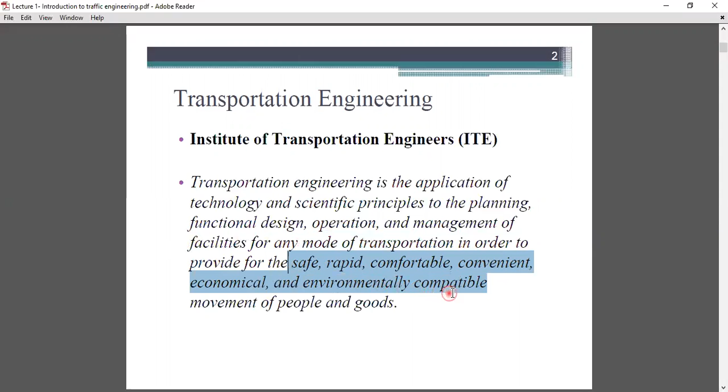There are many definitions, but the short and simple one is that transportation engineering is the application of technology and scientific principles to the planning, functional design, operation, and management of facilities for any mode of transportation.

We are not talking about just road transportation, land transportation, water transportation, or air transportation, but any mode of transportation. This application of scientific principles is carried forward to provide safe, rapid, comfortable, convenient, economical, and environmentally compatible movement of people and goods.

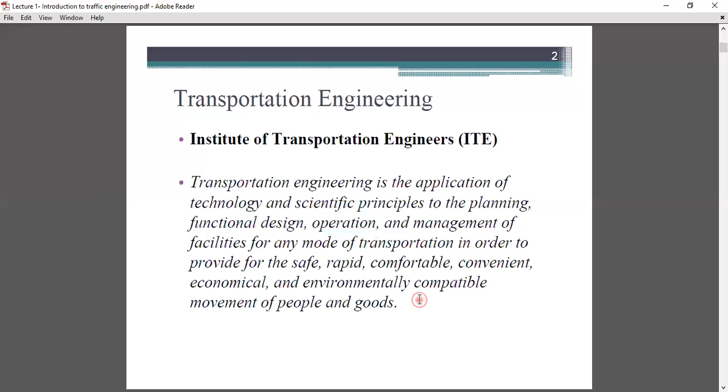So we are studying traffic engineering. What is traffic engineering? Traffic engineering is the phase of transportation engineering which deals with the planning, geometric design, and traffic operation of roads, streets, and highways, the network, terminals, abutting lands, and relationship with other modes of transportation.

Traffic engineering is a subdivision of transportation engineering which deals with the planning, geometric design, and traffic operation of roads — arterial roads, highways, national highways, state highways, major roads, district roads, any mode of roads — street and highway networks, terminals, abutting lands, and the relationship with other modes of transportation.

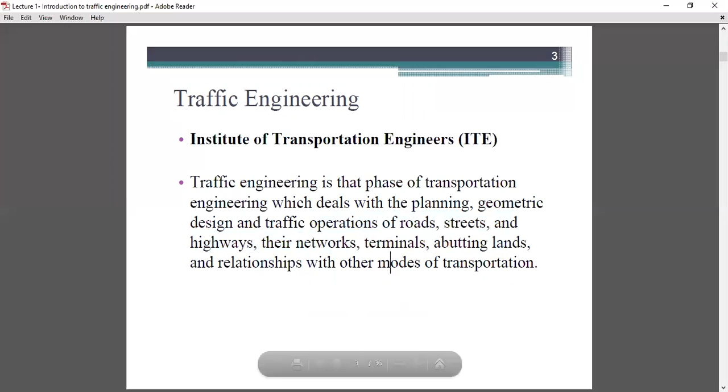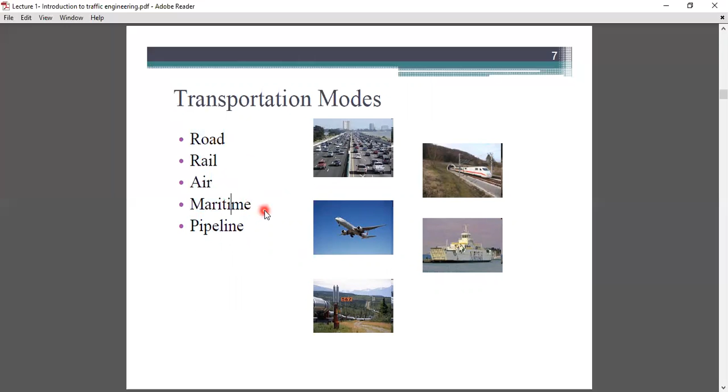There are different types of transportation modes available: road network, rail, air, maritime, or pipeline. Pipeline is commuting or moving fuel or liquid from one place to another — it's a kind of transportation. But there are four main types of transportation: road, rail, air, and maritime, or in simple terms, waterways, or water transportation.

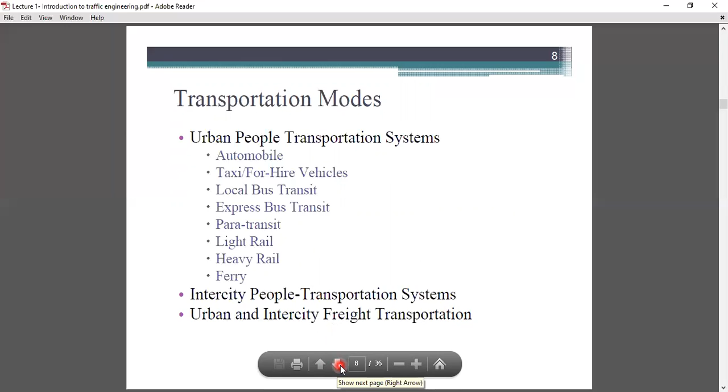These are the different types of transportation studied in the previous subject, urban transportation system, and what modes are available for transportation. Just a fresh look: urban people transportation, intercity people transportation system, automobile, railroad, airways, waterways, and urban and intercity freight transportation.

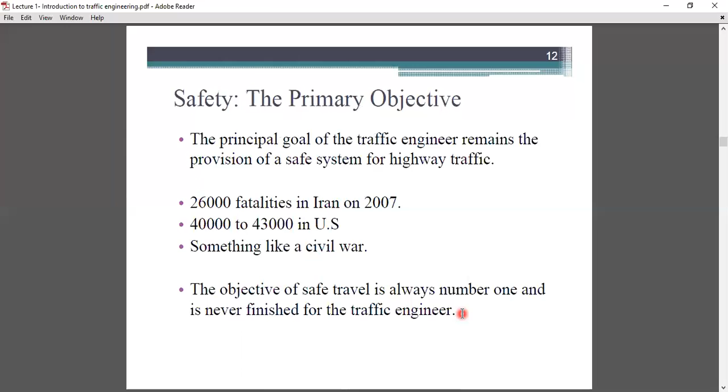Other objectives of traffic engineers are to provide speed, comfort, convenience, economy, and environmental compatibility for the construction of roads as well as sustainable roads.

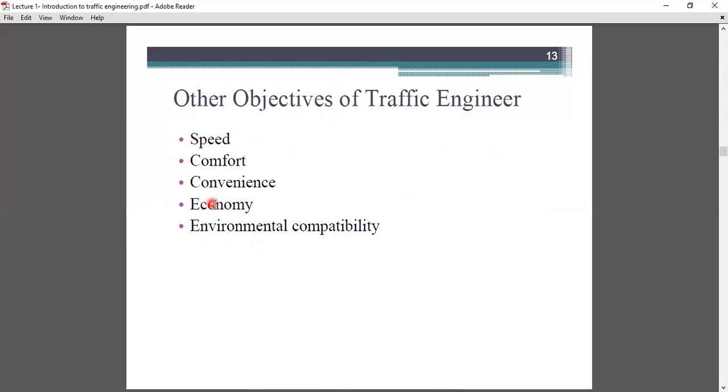Okay, so there are different objectives like speed, comfort, convenience, economy, and environmental compatibility. While speed of travel is much to be desired, it is limited by transportation technology, human characteristics, and the need to provide safety. So there are different types of characteristics available, like human characteristics as well as vehicular characteristics. In human characteristics, we probably know the PIEV theory - perception, intellection, emotion, and volition time theories. There are different types of human and vehicular characteristics which are to be included in traffic engineering.

Comfort and convenience are generic terms and mean different things to different people. Comfort involves the physical characteristics of the vehicle and roadways and is influenced by other perceptions of safety. So comfort, convenience, and the desire of speed differ for different people. Some people want higher speed rather than comfort, but some choose comfort as their primary concern.

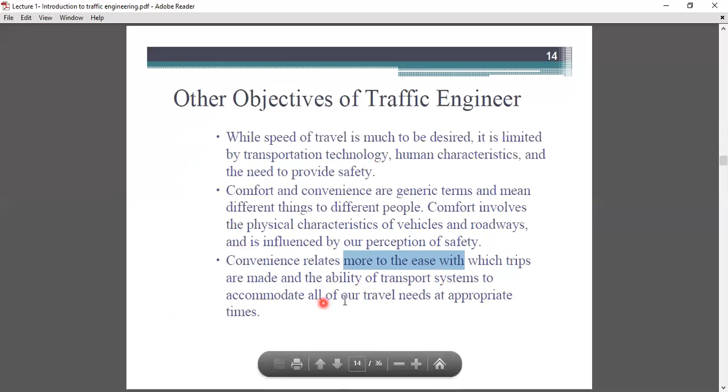Convenience relates more to the ease with which trips are made and the ability of the transport system to accommodate all of our travel needs at appropriate times.

Economy is also relative. There is little in modern transport systems that can be termed cheap. We all know that road infrastructure or any transportation infrastructure has a huge capital investment. Due to modern practices, modern technology, and modern equipment, there is high capital investment going through. Highway and other transportation systems involve massive construction, maintenance, and operating expenditure, most of which is provided through general and user taxes and fees.

Nevertheless, every engineer, regardless of discipline, is called upon to provide the best possible system for the money. So the other concern is to provide economic feasibility.

So if you are hired as a traffic engineer at the NHAI, National Highway Authority of India, your primary concern is to provide a safe, convenient, comfortable, economically feasible, and environmentally friendly plan or road network for the general people and for the country. It is the duty of every engineer to suggest the best possible system for the money. Harmony with the environment is a complex issue that has become more important over time.

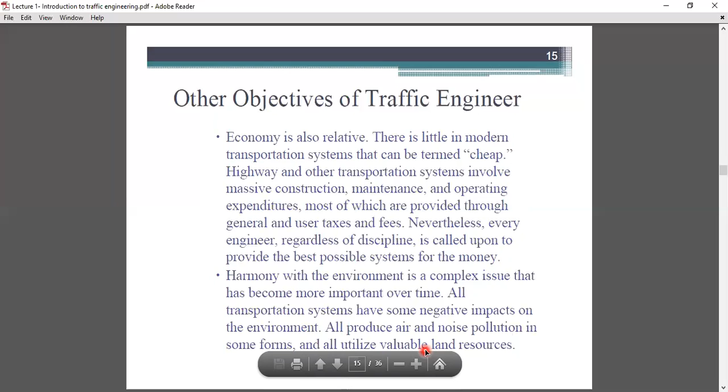This occurs right now because, as we know, due to global warming, there are high voices raised by communities or by many other NGOs that the government wastes valuable land just to create concrete roads and other things. So the best possible suggestions or solutions are given by traffic engineers just to minimize the environmental impact and utilize the best way out of it. Harmony with the environment is very necessary.

Elements of the transport system: there are different types of elements - facilities, vehicles, control system, users, and environment. Facilities refer to what kind of facilities are available. For example, if we are talking about the BRTS bus system, bus stands are called facilities that users are going to use.

Next is vehicles. If you're talking about BRTS buses, we know that right now all the BRTS buses are converted into AC buses, so there is higher comfort and convenience from the past. This type of characteristic falls in that particular way. Thereafter, the control system - the proper scheduling, maintaining, and managing of the particular road network or BRTS network is hectic work, so it should be considered one of the major elements in the transportation system.

Thereafter, users - those who use that particular system with proper comfort and convenience. And last but not least, the environment. As we all know, everything humans build is going to affect the environment in a positive as well as negative manner. So harmony with the environment means providing solutions that minimize the impact on the environment. So it is a major element. There are five different major elements of the transportation system: facilities, vehicles, control system, users, and environment.

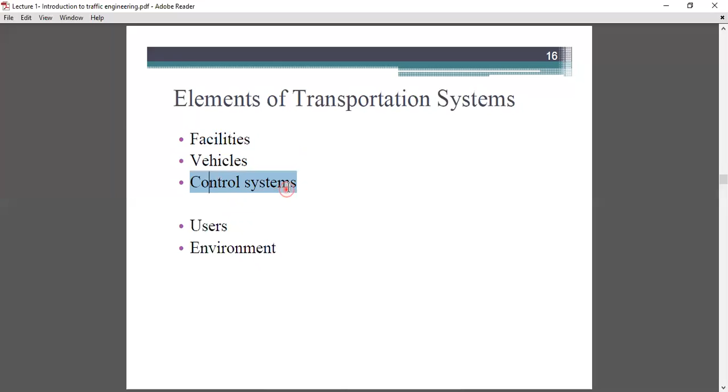Okay, so there are the different types of the elements of traffic engineering. In the past we were talking about the elements of transportation engineering, but right now the elements of traffic engineering. So traffic studies and characteristics, how the current situation occurs, or how it will affect the near future, or the prediction of how traffic will be available in the next 5 or 10 years, or what congestions will occur at that particular time.

Next one is performance evaluation. Performance evaluation is nothing but providing how the particular system will work for the users, or what kind of difficulties or problems are going to occur.

Next one is facility design. Facility design is nothing but developing a road that reduces the number of fatal accidents, as well as reduces queues at the signals, or reduces traffic congestion at that road. So facility design has a more significant impact in traffic engineering.

Next one is traffic control. There are different types of traffic control parameters or methodology used, like sign boards, markings, signals, bumpers. So this kind of traffic control devices or methodology are used in that particular domain to just optimize or utilize the best out of it.

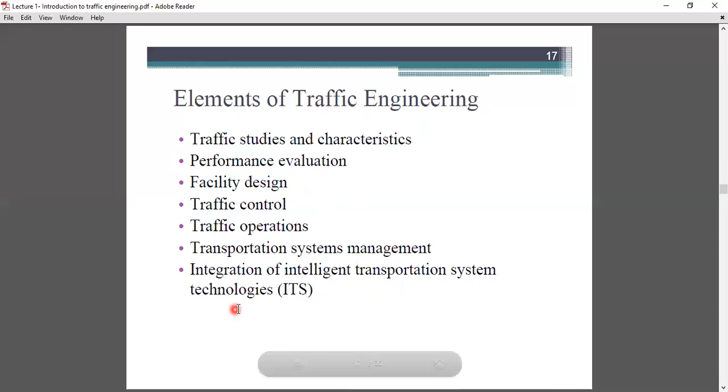Okay, so first one is traffic studies and characteristics, which involve measuring and quantifying various aspects of highway traffic. Studies focus on data collection and analysis used to characterize traffic, including traffic volumes and demand, speed and travel time, delay, accidents, origin and destination, modal use, and other variables.

So this kind of survey we do in traffic studies covers traffic volumes and traffic demand. How the travel demand is going to affect that particular region, what is the trip generation ratio, what is the trip distribution ratio, what is the trip attraction ratio, and what is the modal split, or which modes people are using for their day-to-day commute.

So speed and travel time, delay, accidents, the number of fatal accidents, and various other data collection are needed, and this data is analyzed to identify how traffic characterizes in the current situation as well as in the next 5 or 10 years.

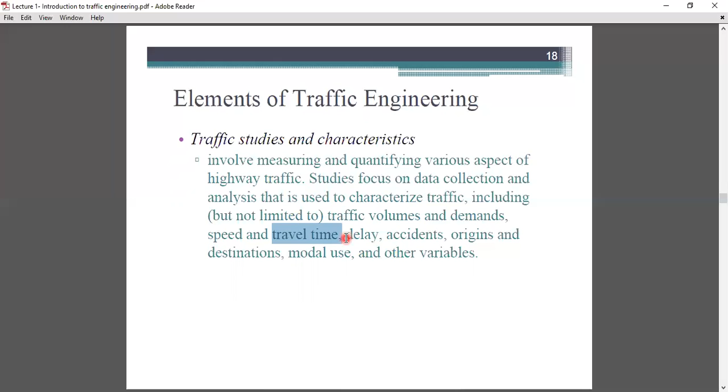Next is performance evaluation, which is the means by which traffic engineers can rate the operating characteristics of individual sections of facilities, and the facility as a whole in relative terms. Such evaluation relies on the measure of performance quality, and is often stated in terms of the level of service, which is a different portion.

So the Ministry of Urban Development publishes an LOS booklet every 2 years, and LOS classifies the level of service, or it is a rating system of that particular service used by the general people. So performance evaluation is a kind of system where people rate that particular system, how it will affect their day-to-day life, what are the comfort and convenience, and how safe the system is.

So that is performance evaluation.

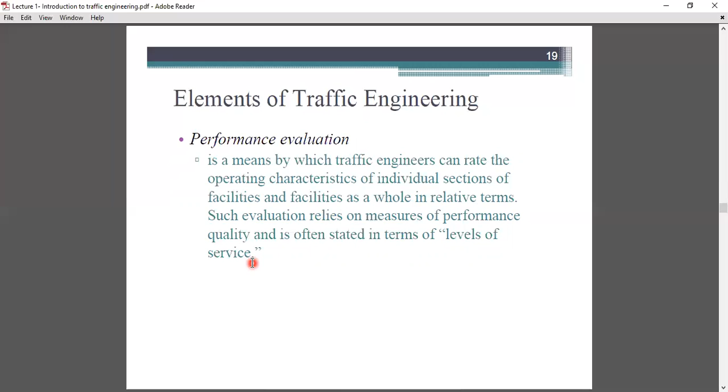Next is facility design. Facility design involves traffic engineers in the functional and geometric design of the highway and other traffic facilities. Traffic engineers per se are not involved in the structural design of highway facilities, but should have some appreciation for the structural characteristics of the facility.

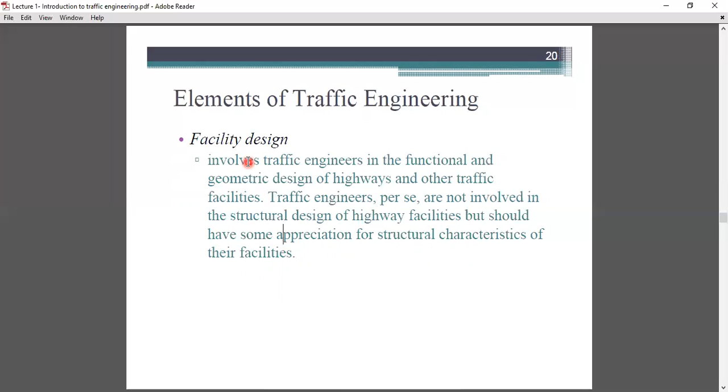In traffic engineering, we are not necessarily concerned with the structural characteristics of the highway, like whether it is a rigid or flexible pavement, or the thickness of the base and sub-base layers. But it involves an appreciation, or suggesting a suitable solution to the structural designer who designs the pavement for that national or state highway. So in facility design, traffic engineers only focus on how it will affect day-to-day users.

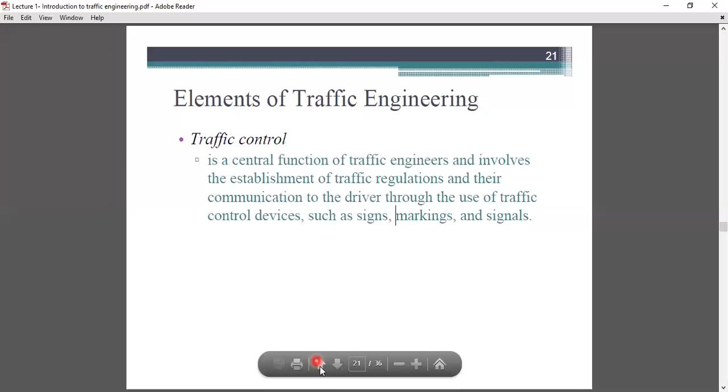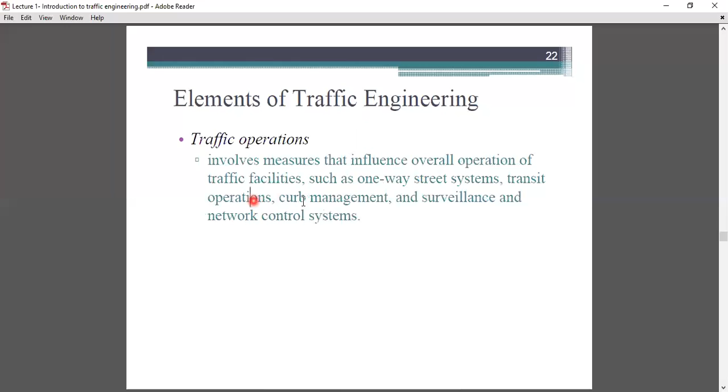Next is traffic operation. It involves measures that influence the overall operation of traffic facilities, such as one-way street systems, transit operation, curb management, and surveillance and network control systems. Different operational methodologies are used for preventing excessive vehicles from going through a particular street, such as one-way street systems, transit operation, curb management, and surveillance and network control systems.

The next one is transportation system management, which involves virtually all aspects of traffic engineering, focusing on optimizing system capacity and operation. Specific aspects of TSM include high occupancy vehicle priority systems, carpooling programs, pricing strategies to manage travel and traffic demand, and similar functions.

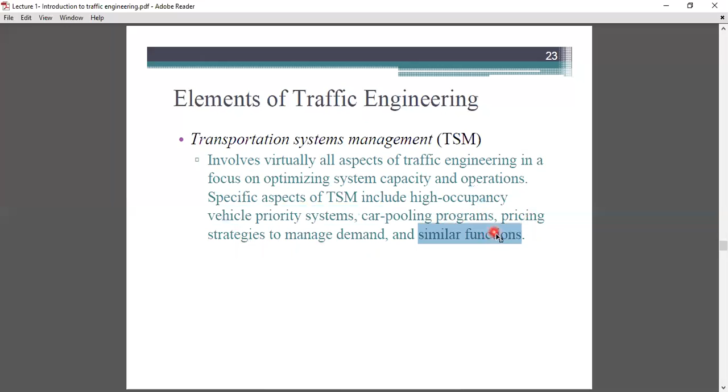The next one is intelligent transport systems, which refers to the application of modern telecommunication technology to the operation and control of the transportation system. Such systems include automated highways, automated toll collection systems, vehicle tracking systems, in-vehicle GPS and mapping systems, automated enforcement of traffic lights and speed laws, smart control devices, and others.

But intelligent transport systems are kind of a very costly infrastructure, so they are not used frequently. But due to technological advancement in transportation and traffic engineering, there are still upgradations and improvements going on in that area. In the very near future, say the next 5 or 10 years, we will see these kinds of systems very frequently used for day-to-day commuting.

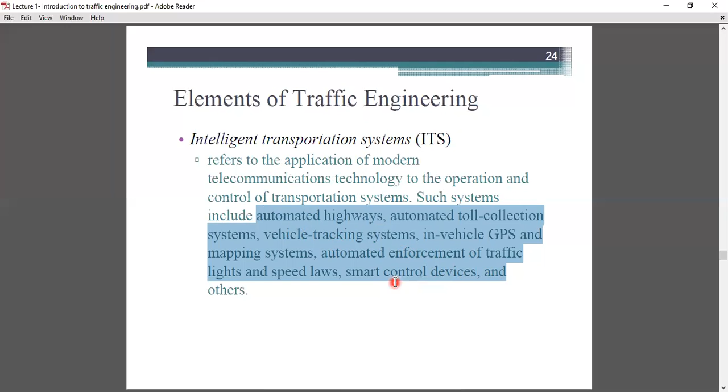So there are different elements of traffic engineering. One is transportation demand. We've already had some discussion on this in urban transportation systems, about what transportation demand is and the difference between mobility and accessibility. Let's take a quick look at that again.

Transportation demand is directly related to the land use pattern and the available transport system and facilities. In simple terms, if in a particular region, say 100 people reside in a 1 square kilometer area, and 90% of those people are engaged in economic or employment activity, then for that area, more than 90% of travel demand is available for trip production as well as trip attraction ratio.

So transportation planners and traffic engineers attempt to provide capacity for observed or predicted travel demand by building the transportation system. The improvement of the transportation system, however, makes adjacent and nearby land more accessible and therefore more attractive for development.

Building new transportation facility leads to further increase in land use development, which results in high transportation demand. So for obtaining the transportation demand, there are certain types of methodology and models used, like gravity models, regression models, and intervening opportunity models.

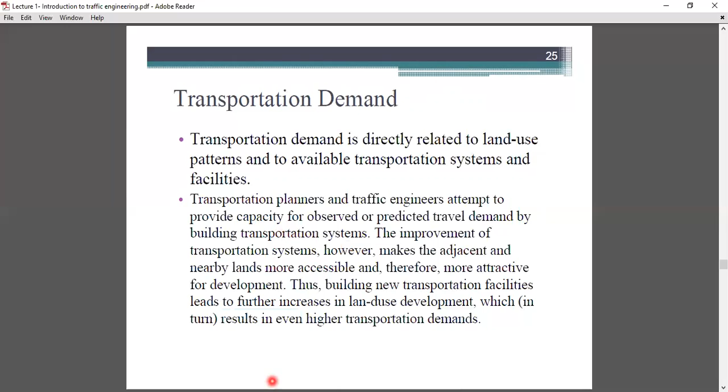So to obtain that kind of travel demand, the first step is to create an O&D survey, origin and destination surveys. This is the transportation demand. It's connected with the transportation facility, connected with land use, and also connected to the transportation demand.

So next one is mobility and accessibility. So what is mobility and what is accessibility? In very simple terminology, accessibility is nothing but access to the activity.

And what is mobility? Mobility is nothing but access to movement. So accessibility is access to the activities. Like if we are talking about any bus transportation system, how you gonna reach that bus stop very frequently, so it's called accessibility. If a bus stop is near your home, frequently say a 5 minute distance, then there is high accessibility available in your area. So accessibility is access to the activities, and mobility is access to movement.

So when you reach that particular bus stop, and how fast you will get a new bus for ridership, it's called mobility. So it is very much connected with each other, mobility as well as accessibility.

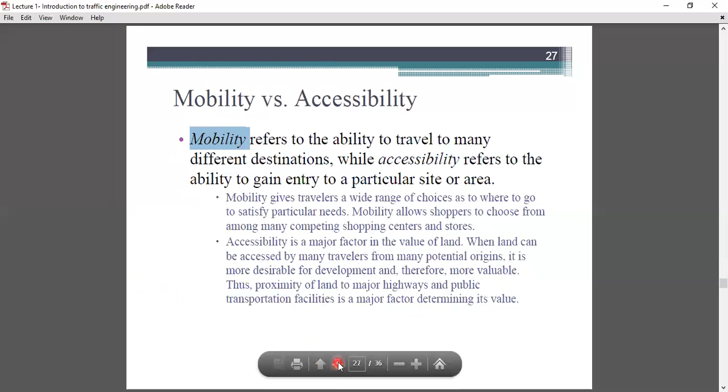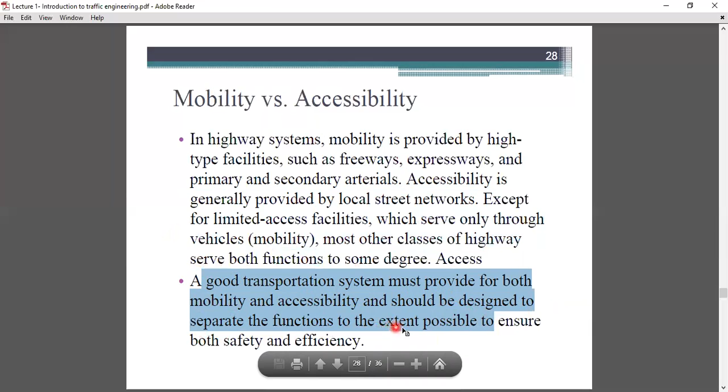In a highway system, mobility is provided by high type facilities such as freeway, expressway, and primary or secondary arterial. Accessibility is generally provided by local street network, except for limited access facilities which serve only through vehicles. Most other classes of highway serve both functions to some degree. A good transportation system must provide for both mobility and accessibility, and should be designed to separate the functions to the extent possible to ensure both safety and efficiency.

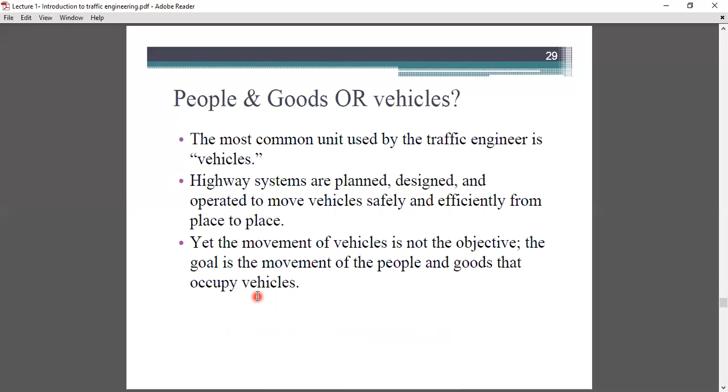People and goods, or vehicles - the most common unit used by the traffic engineer is the vehicle. Highway systems are planned, designed, and operated to move vehicles safely and efficiently from place to place. Yet the movement of vehicles is not the objective itself; the goal is the movement of the people and goods that occupy the vehicle. So the main goal is the movement of people from one location to another, or the movement of goods from a home industry to the parent, or from the parent industry to another industry. These are the main goals of traffic engineers.

These are some statistics which may be used.

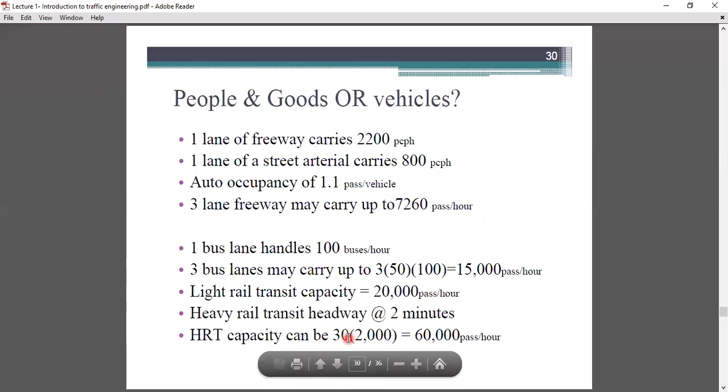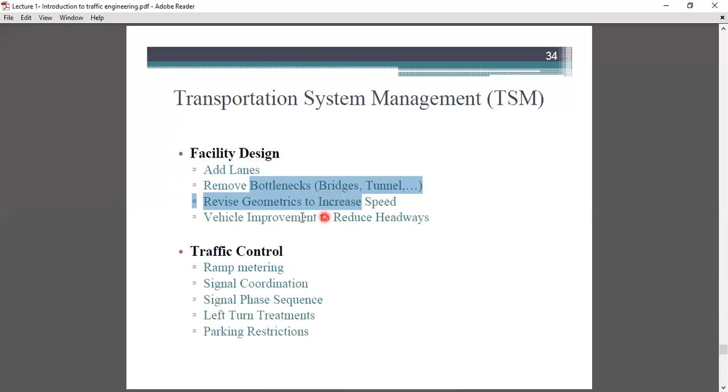So in TSM, transportation system management, there are two types of fundamental approaches available: facility design and traffic control. Facility design includes adding lanes, removing bottlenecks, bridges and tunnels, revising geometrics to increase speed, or providing super elevation to smoothen curve formation, or vehicle improvement to reduce headways. Traffic control includes ramp metering, signal coordination, signal phase sequences, left turn treatments, parking restrictions, and these types of suggestions or solutions are adopted worldwide.

So TSM we discuss in the sixth semester urban transportation system course. If you have any queries, please go through that particular theory so you can easily understand what TSM is. So this is the very first lecture of traffic engineering, the basic introduction of what traffic engineering is and what a traffic engineer does in the real world.